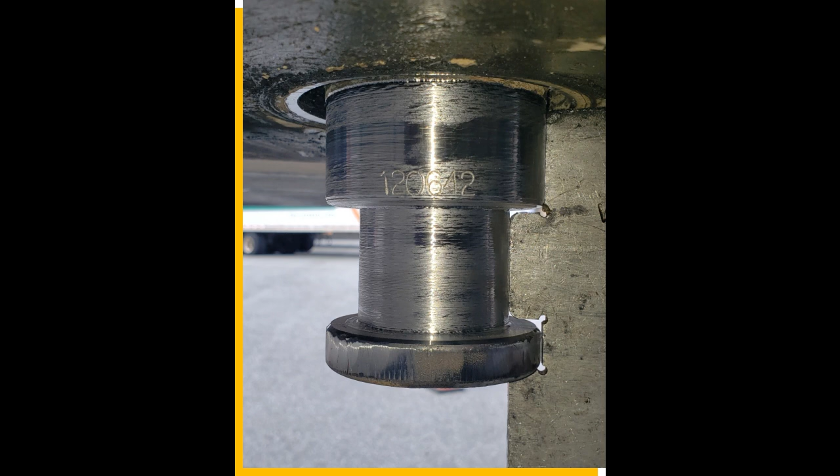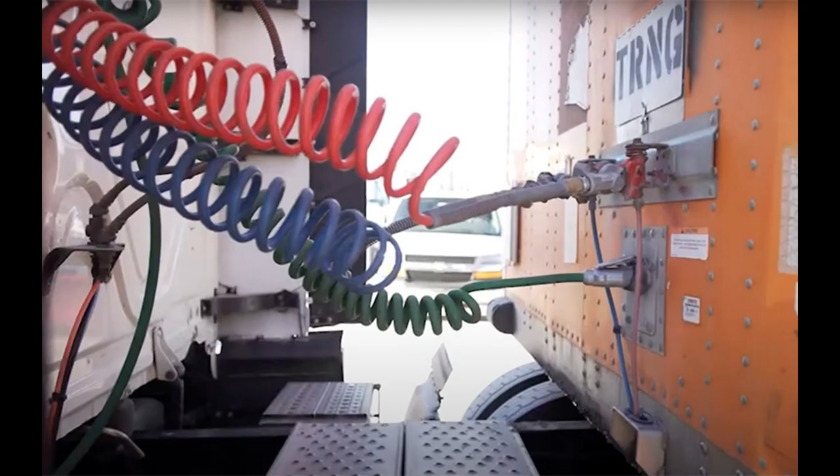First things first, man, I'm gonna inspect my kingpin, man. It's properly mounted and secure. My kingpin is not cracked, bent, or broken, man. Next, I'm gonna inspect my airlines, man. I'm gonna make sure they're properly mounted and secure, man. No abrasions, bulges, or cuts at both ends. And they're not leaking air, man.

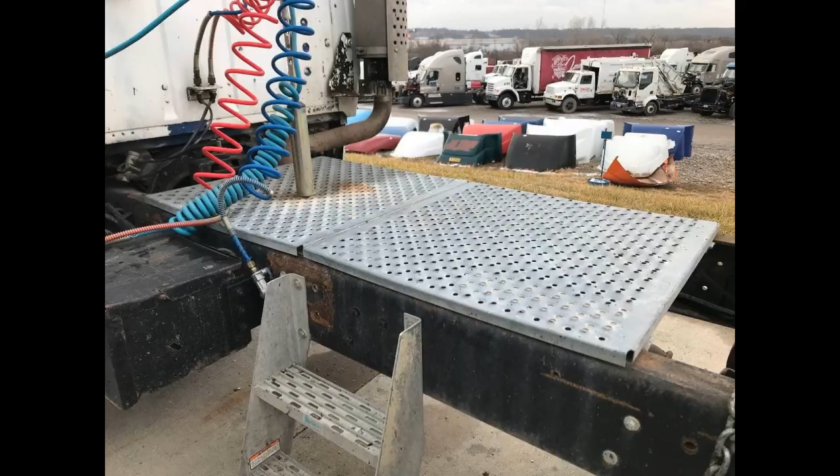The next thing I'm gonna do is I'm gonna check out my catwalk, man. My catwalk is properly mounted and secure. It's not cracked, bent, or broken. The catwalk is clear of any loose objects, man. The catwalk steps can support the driver's weight.

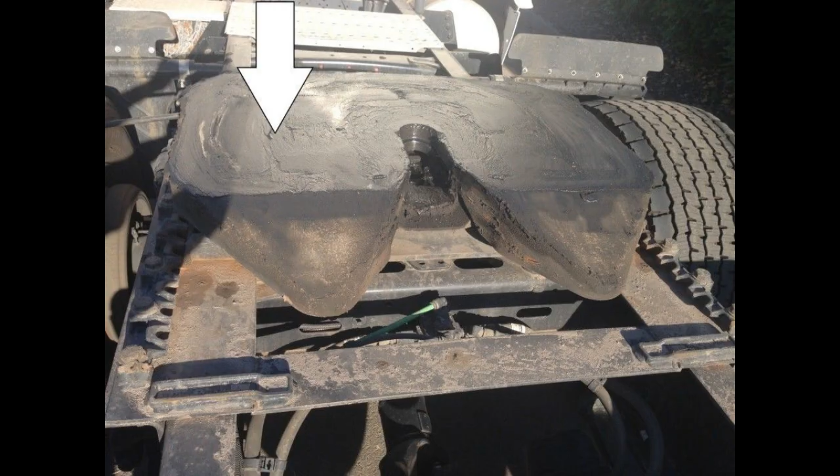Next, I'm gonna inspect my skid plate, man. My skid plate is properly mounted and secure. It's not cracked, bent, or broken. It's properly lubricated, man. Next, I go on to my release arm, man. My release arm is properly mounted and secure. It's not cracked, bent, or broken. It's in the lock position, man.

Next, I'm going to inspect the platform, man. The platform is properly mounted and secure. It's not cracked, bent, or broken.

The fifth wheel. Oh, man. I fell down while inspecting my vehicle. Still recording? Okay. What was I saying?

My platform is properly mounted and secure, unlike my phone. It's properly mounted and secure. It's not cracked, bent, or broken. The fifth wheel is mounted on the platform, man. And all the mounting bolts are present, man.

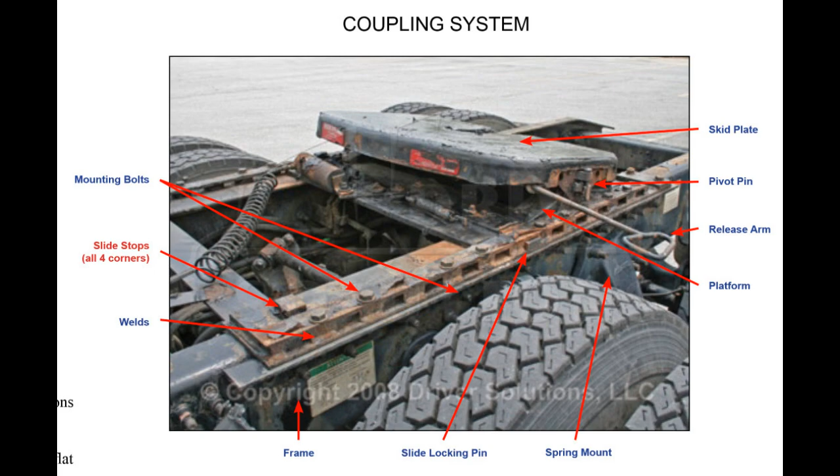Next, I'm going to check out my trailer apron. My trailer apron is properly mounted and secure. It's not cracked, bent, or broken, man. There is no visible space between the trailer apron and the fifth wheel skid plate.

Next, I'm going to go behind the trailer, man. I'm going to inspect these rear cargo doors, man. I'm going to make sure they're properly mounted and secure. Not cracked, bent, or broken. The doors open, close, and latch properly from the outside, man. The DOT bumper is present and intact, not peeling or messed up, man.

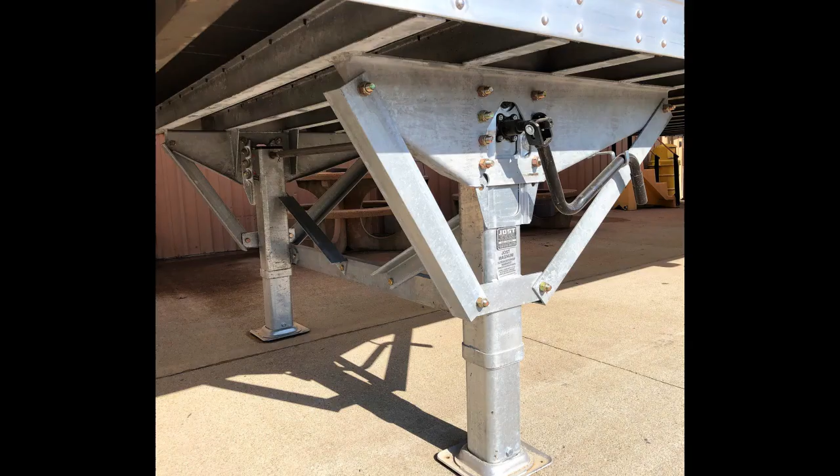Next, I'll check out my landing gear, man. My landing gear is fully raised. It's not cracked, bent, or broken, man. It's properly mounted and secure. The legs go up and down together, and the crank handle is securely stowed in its cradle, man.

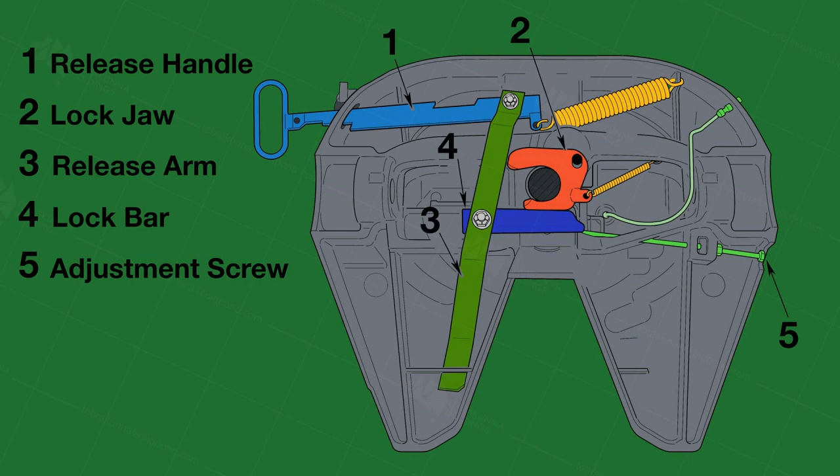Next, let's check out those locking jaws, man. The locking jaws are properly mounted and secure. They're not cracked, bent, or broken, man. The locking jaws are fully locked around the shank of the kingpin, man.

Now let's go on to how to hook up a trailer, man. How do you hook up a trailer, man? Well, the first thing you do is you line up the edge of the back of the trailer to match the edge of the tractor's tires, man. Then you pull right under the trailer till you hear a latch sound, man. Then you pull the parking brake, which is the yellow one. You can ignore the locking pin, man. It locks on its own. Hook up those glad hands, man, and then raise the landing gear, man.

And then if you want to unhook a trailer, what you want to do is drop the landing gear down, man. Remove all those glad hands, man. Release the locking pin by reaching it and pulling, man. And then you push the yellow button, man. And then you can just pull away.

Next, let's talk about inspecting my spring mount, man. You want to make sure your spring mount is properly mounted and secure. Not cracked, bent, or broken, man. Now let's check out those leaf springs, man. The leaf spring should be properly mounted and secure, not cracked, bent, or broken. None have shifted out of place, man.

Now let's check out the springs in general. The springs in general should be properly mounted and secure at both ends, man, and not cracked, bent, or broken.

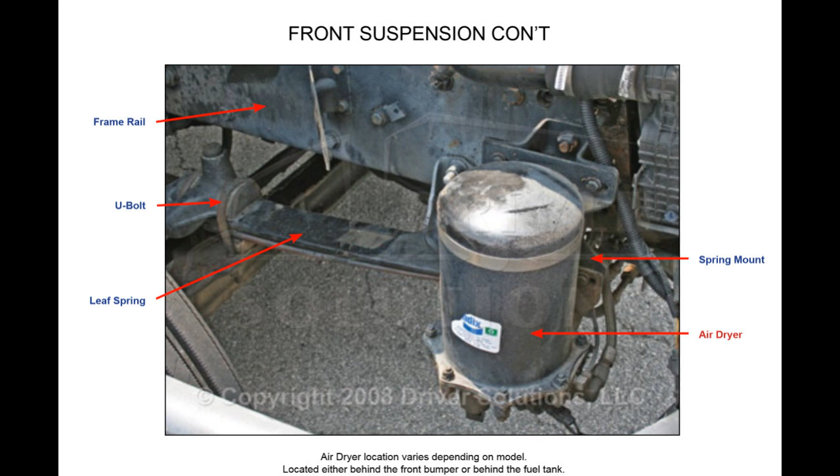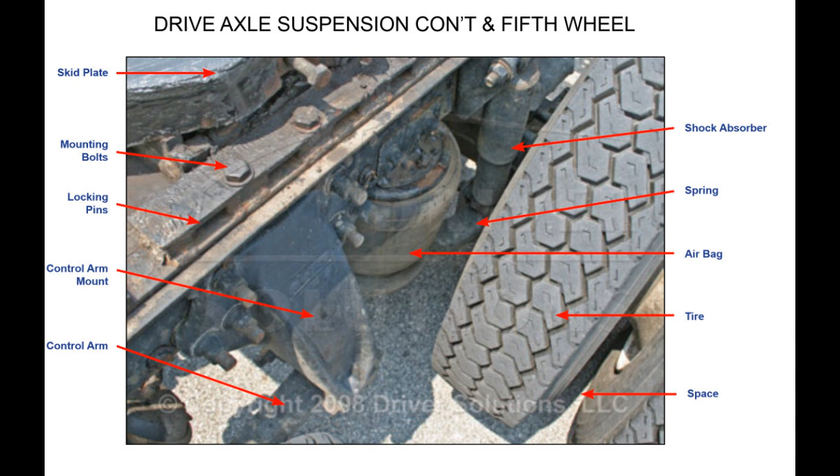Now we're gonna check out the shock absorber, man. That shock absorber should be properly mounted and secure at both ends, man. Not cracked, bent, or broken. They are not leaking, man.

Now let's inspect that power steering reservoir, man. The power steering reservoir should be properly mounted and secure, not cracked, bent, or broken. No leaks, man. And the dipstick checks the levels just like the oil, man. You stick it in, you pull it out, you wipe it off, you stick it in again and check the reading, man.

Now let's talk about the gear-driven power steering pump, man. The gear-driven power steering pump should be properly mounted and secure, man. Not cracked, bent, or broken with no leaks, man. And if you follow the hose from the power steering reservoir, it leads right back to my gear-driven power steering pump, man.

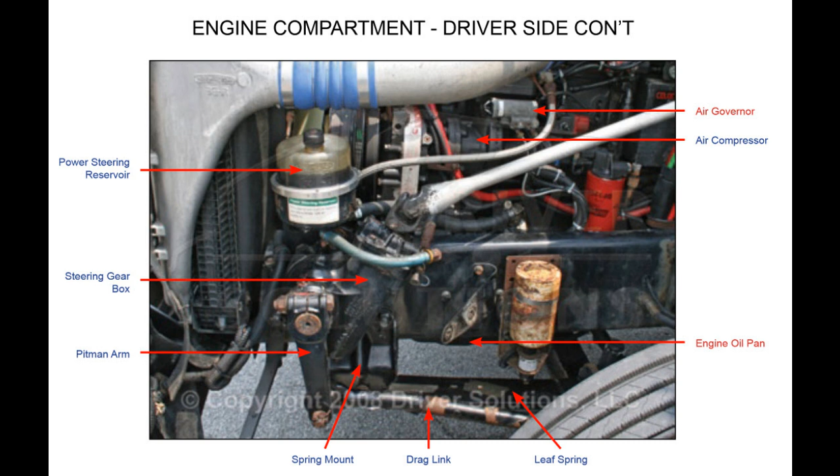Now let's inspect the steering gearbox, man. The steering gearbox should be properly mounted and secure, not cracked, bent, or broken. No abrasions, bulges, or cuts, man. The gearbox is not leaking, man. The power steering gearbox hoses are properly mounted and secure at both ends with no abrasions, bulges, or cuts. The hoses are not rubbing on anything, man.

Now let's check out the steering linkage, man. The steering linkage is properly mounted and secure, not cracked, bent, or broken. The drag link connections are made with a castle nut and a cotter pin, man. So remember, man, the steering linkage is made with the castle nut and the cotter pin, man. Nothing is twisted or wrapped around the tie rod, man.

What do you think this is, man?

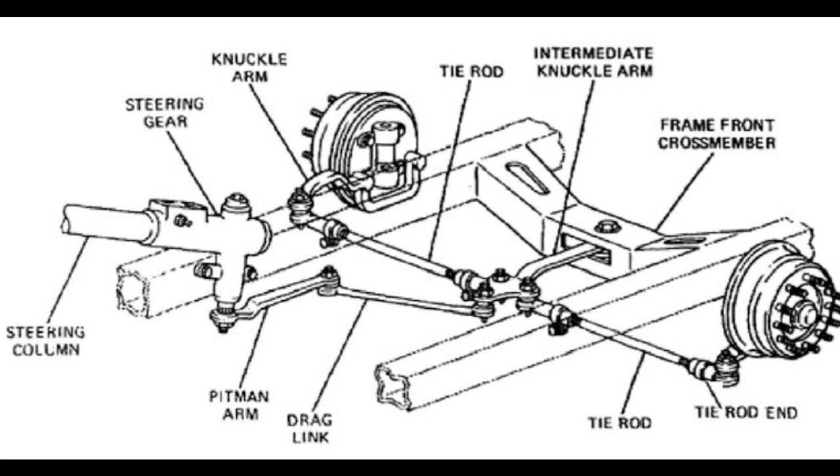Now let's talk about the steering column, man. The steering column is properly mounted and secure, man. It's not cracked, bent, or broken. There's no excessive movement at the U-joint, man. The steering wheel should not have more than 10 degrees of play. That's all in regards to the steering column, man.

Now let's inspect the brake drum and pads, man. I'll tell you what, man. The brake drum and pads should be properly mounted and secure. Not cracked, bent, or broken. No illegal welds, man. And no less than a quarter-inch thickness on the brake pads. No grease, oil, or debris in between my brake pads and my brake drum, man.

Man, you should also inspect your front brakes. Let me tell you what. The front brakes, man, should be properly mounted and secure at both ends. No abrasions, bulges, or cuts. The hoses are not leaking air, and the hoses are not rubbing on anything, man.

Next, man, you should inspect your slack adjusters and the push rod, man. You know why? Because the slack adjuster and the push rod should be properly mounted and secure, not cracked, bent, or broken. And with the brakes released, that push rod does not move more than 1 inch when the slack adjuster is pulled.

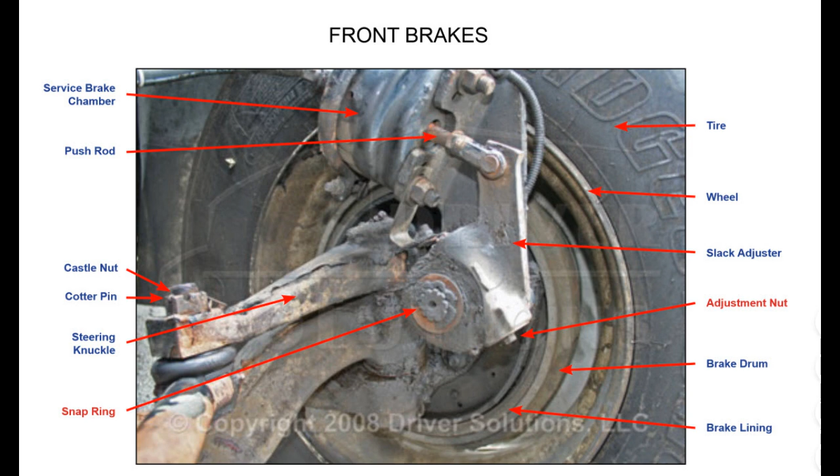You should also inspect your rims, man. Listen, the rim should be properly mounted and secure, not cracked, bent, or broken. The flange is not bent. There are no illegal welding repairs and there are no rust trails, man.

While you're down there, man, why don't you inspect those lug nuts, man? You should have all 10 lug nuts and they are in place. None are missing. There should be no rust trails. There should be no powder residue, man. There should be no cracks around the bolt holes, man. Listen to me.

Why don't we check out the wheel seal, man? The wheel seal is also called the hub seal or the axle seal. They should be properly mounted and secure, not cracked, bent, or broken, and the wheel seal should be filled to the manufacturer's specifications, man.

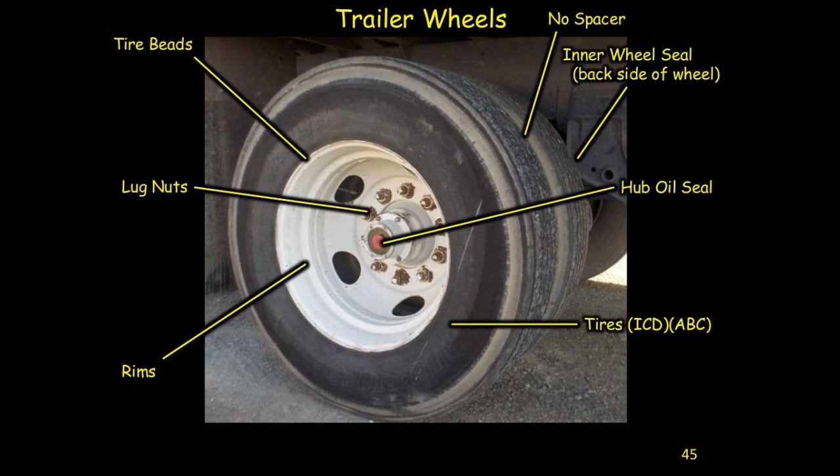Next, we should inspect the tire spacers, man. The tire spacers should be properly mounted and secure, not cracked, bent, or broken, and not rusted through, man. There should be proper spacing between the two tires. There should be no foreign objects stuck in between those tires, man.

Next, let's inspect the tires themselves. Listen, there should be no abrasions, bulges, or cuts on the tread or the sidewall. There should be no visible tread separation. There should be no evidence of uneven wear on them tires, man. There should be no foreign objects stuck in the tire.

The tire is not leaking air. All valve stems, inner and outer, have caps. And the tires should be filled to the manufacturer's specifications. And the tread should be at least 4/32 on the steering tires and 2/32 on all those other tires, man.

You should also inspect the trailer lights and those reflectors, man. Make sure that those are clean, not cracked, bent, or broken, and the proper colors, man. You should inspect the frame side rails. The frame side rails should be properly mounted and secure, not cracked, bent, or broken, and there are no non-factory welds, man.

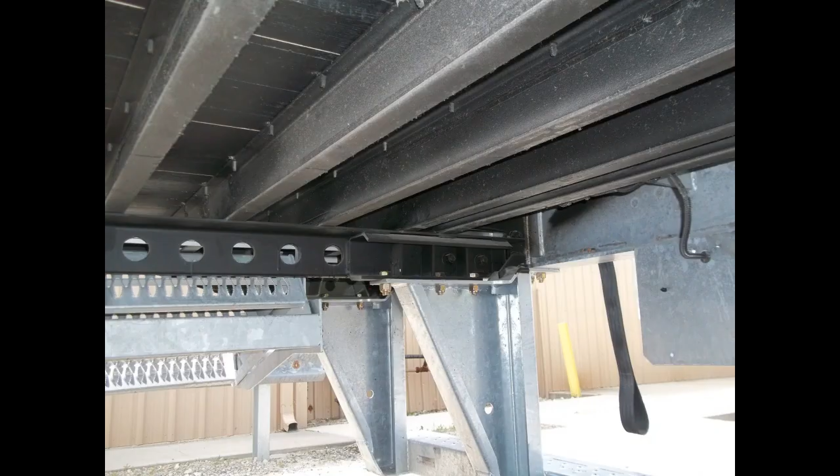Next, you should inspect the header board. That header board should be properly mounted and secure, not cracked, bent, or broken, no holes, no missing rivets, man. You should inspect the cross members on the trailer and the side rails, man. Those cross members and side rails, properly mounted and secure, not cracked, bent, or broken, no non-factory welds, man.

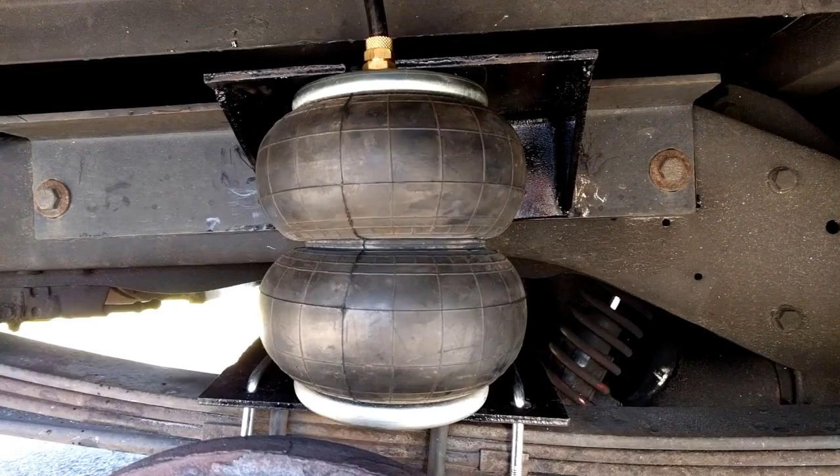You should inspect your tractor's front airbags. Make sure they're properly mounted and secure, no abrasions, bulges, or cuts, no mounting bolts that are missing, man. No airbag mounts or bolts that are cracked, bent, or broken. And that the airbag is not leaking air, man.

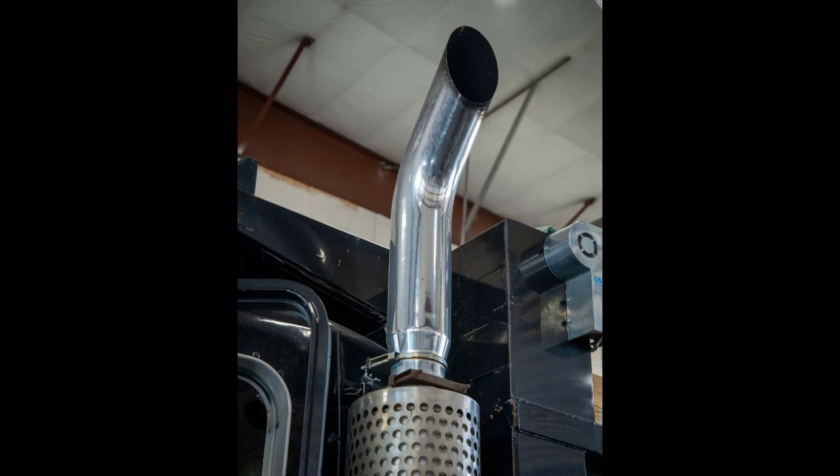You should walk around to your engine now, man. And you should inspect the coolant reservoir. The coolant reservoir should be properly mounted and secure, not cracked, bent, or broken, with no leaks. Then inspect your exhaust, man. Make sure your exhaust system is properly mounted and secure, not cracked, bent, or broken. No soot trails which may indicate a leak, man.

If you want to take an overall engine condition, you just take it looking out and looking in at the engine, man. I don't see any leaks or hear any leaks. There's no missing bolts, clamps, or nuts, and there's no hanging wires, man.

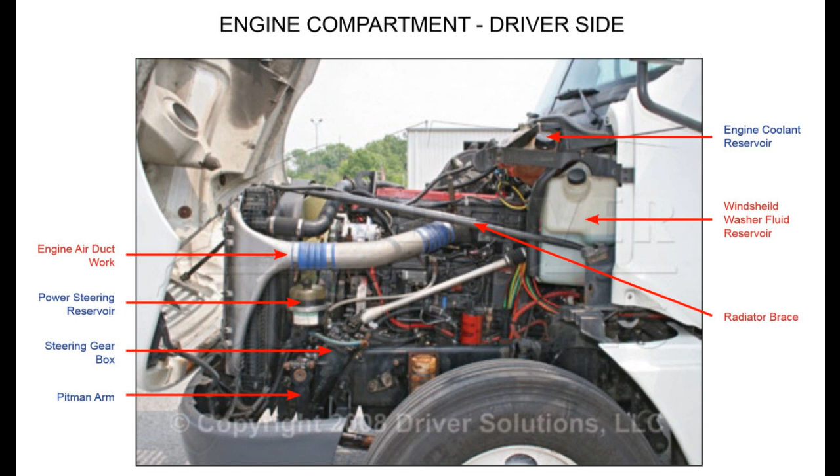Now I should inspect my belt-driven alternator. My belt-driven alternator is properly mounted and secure, not cracked, bent, or broken. No missing nuts or bolts. The wires on the back are secured, man, and there's no exposed wire or illegal tape.

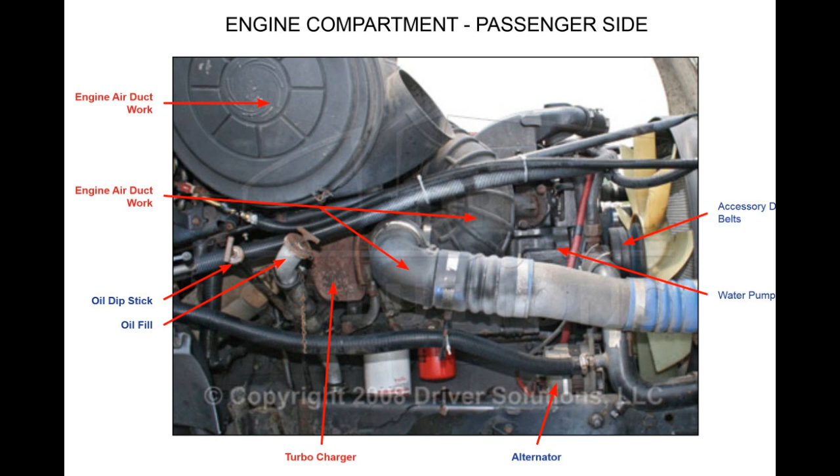Now let's check out the belt-driven water pump, man. The belt-driven water pump is properly mounted and secure, not cracked, bent, or broken. No missing nuts or bolts and no leaks. Frame and my cross members, they're properly mounted and secure, not cracked, bent, or broken. No non-factory welds or holes.

Let's inspect our reflecting tape, man. Our reflector tape is DOT tape and it's present. It's clean. It's affixed securely, man.

Now let's inspect our fuel tank. Our fuel tank is properly mounted and secure. It's not cracked, bent, or broken. It's not leaking, man. And no fuel lines are leaking. Like I said, the tank's not leaking and the fuel lines are not leaking.

The fuel filler caps are closed tight, man. And the rubber spacers are present. Those rubber spacers are the things that keep the fuel tank attached, man. Otherwise, if you don't have that, it's metal rubbing on metal.

It's not good, man. Let's inspect our driver's door. It's properly mounted and secure. It's not cracked, bent, or broken. The door opens and closes and latches properly from the outside, man. The hinges support the driver's weight. And the door seals are not worn, torn, or rotted, man.

Let's also inspect our mud flaps, man. Our mud flaps are properly mounted and secure, not cracked, bent, or broken, man.

Let's inspect our turn signals, man. Our turn signals are clean. They're of the proper color. They work. They're properly mounted and secure. They're not cracked, bent, or broken, man.